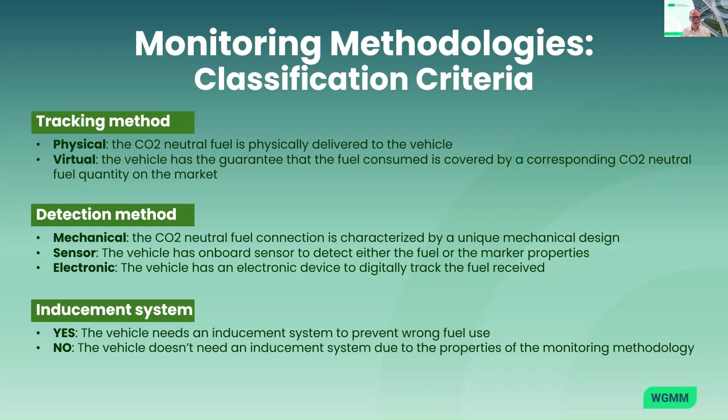But let's go to the next one. As mentioned, in end of December we delivered a long report on this, around 130, 140 pages. We also saw the need to make a summary, one-pagers of each solution, now available since last year. The group also produced other reports, like the availability of feedstock. So there's a lot of interesting work here. With the QR code, you can go to the website and find out more details afterwards if you want to go into even more.

So with that, I think we can go into the first presentation on the options here. To start with, we have Marco from Bosch and Alberto from Eurogas, who will present options 3 and 11 here. So please go ahead.

Thank you very much for the introduction, Mats. Good afternoon, everyone, also from my side. I would like to present option 3 and option 11 together with Alberto about the digital fuel twin.

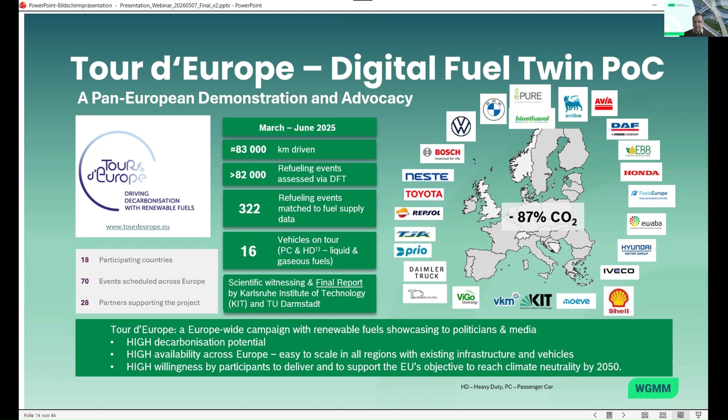To conclude, the benefits of digital tracking and its robustness have been tested with several partners. It's a tamper-proof solution because the data from the vehicle and from the fuel stations, from the cloud, is stored in different places, so it's not easy to manipulate the system on single clients of the system.

It's easy to scale, because no new additional hardware installation is needed along the entire fuel supply chain, and it's flexible for adaptation to any kind of new regulations. Last but not least, it's a universal solution for different liquid and gaseous fuels for different powertrains.

But before going to that, I would like to hand over to Alberto regarding the bio-LNG with convincing figures. Alberto, the stage is yours. Yeah, thank you very much.

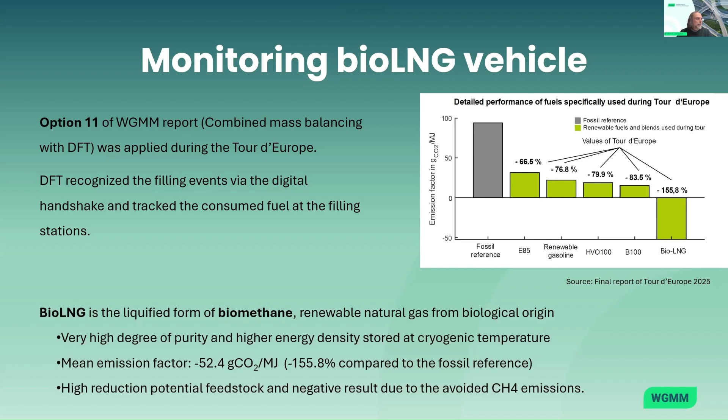Another slide on the bio-LNG key figures. It is now used in heavy-duty vehicles, but the interest in the maritime sector is still growing.

It's a drop-in fuel, so it's compatible with all existing engines, and is already largely available in Europe. We have, according to our detection, more than 300 filling stations already delivering bio-LNG, and with the mass balancing mechanism, all the existing 800 filling stations could deliver certified bio-LNG.

Last but not least, there is a very interesting growing potential of bio-LNG fuel. As you can see on the graph, we are now, in 2023, at a production of around 4 billion cubic meters, which can reach 40 in 2030, around 100 in 2040, and 150 in 2050 across the whole of Europe.

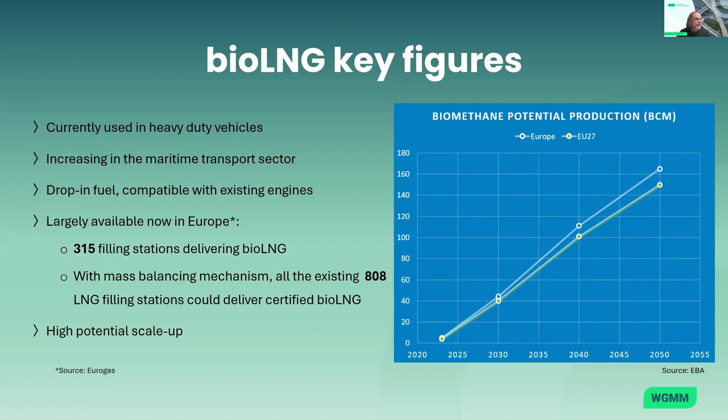So let's return to the Tour d'Europe initiative. One Iveco S-Way LNG truck was equipped with the DFT, and it covered more than 5,000 kilometers across Italy, Austria, Germany, France, and Belgium in June last year, and it was refilled with 100% certified bio-LNG.

The tour included 8 biomethane stations with 7 different energy partners. So it showed that monitoring gaseous and liquid gaseous fuels was possible, and also interfacing with different partners, as you can see on the screen. 7 was included in the tour.

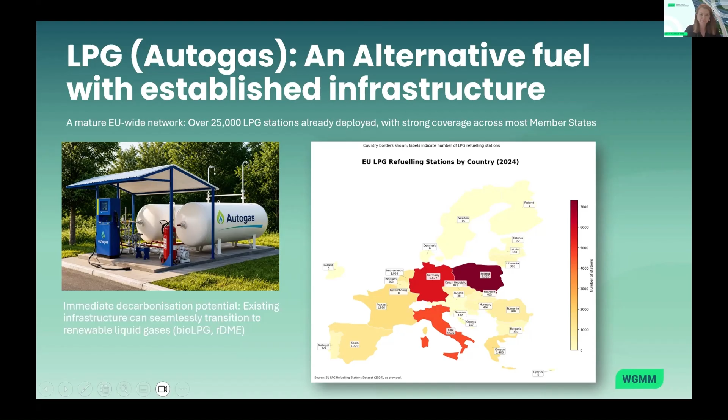Liquid gas is already entering European markets through existing refining processes and distribution infrastructure. Of course, the key question is scale: how much of this can we realistically produce? According to our report, in a high support scenario, we can reach around 7.5 million tons by 2040 and around 27 million tons by 2050. This is a production that could potentially cover 100% of the LPG demand by 2050, based on available European feedstocks, existing industrial production pathways, and co-production with fuels like renewable diesel. So the potential is real, but it depends on the framework we create.

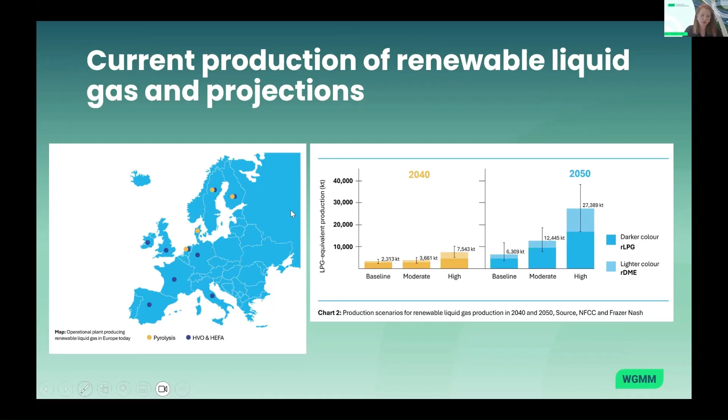Because renewable liquid gas can operate within the existing distribution system, it can offer one of the fastest pathways for near-term emission solutions. That brings me to the core of the discussion, which is mass balance. In a real fuel system, renewable and conventional molecules are mixed across the supply chain. So the key question is, how do we account for renewable fuels in a credible way? Mass balance provides the answer. It ensures that for every unit of renewable fuel produced, an equivalent amount is tracked and allocated to end users without requiring physical separation at every step.

This is not a new concept. It's already used in biofuels, electricity markets, and other certification systems. And it's essential because without mass balance, scaling renewable fuels in real-world systems becomes extremely difficult and costly. To conclude, there are three key messages.

First, renewable liquid gas allows immediate emissions reduction using existing infrastructure. Second, mass balance enables scaling within real-world fuel systems. And third, monitoring methodologies make this system credible and verifiable.

So the technology is there, the infrastructure is there. What we need now is a policy framework that recognizes and enables these solutions at scale. Thank you very much.

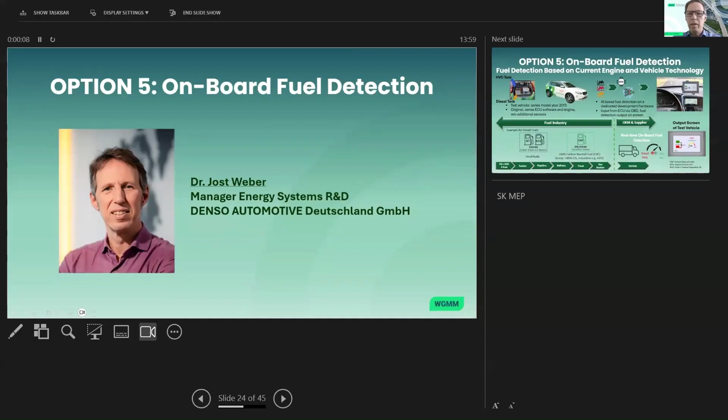Okay, thank you, Mats, for the kind introduction. Today, I'm going to introduce you to option number 5 in the report of the WGMM on onboard fuel detection.

Our technology is based on current engine and vehicle technology. In the fuel industry, they are working on future fuels. We currently have 2 standards. For diesel, we have the EN 590 for regular fossil fuels and blends, where you have up to 26% possibility to blend in paraffinic diesel fuels, which can be renewable. On the other hand, there is already a standard for paraffinic diesel fuels, which can be made out of vegetable oil or waste. These are already available on the market today. They have a reduction potential of more than 80% CO2 reduction.

For example, the HVO, which is also very popular - I'll come to this point later. But in the future, these fuels also have the potential to achieve 100% carbon neutrality. These fuels differ a little bit in terms of properties, in terms of density, viscosity, and compressibility.

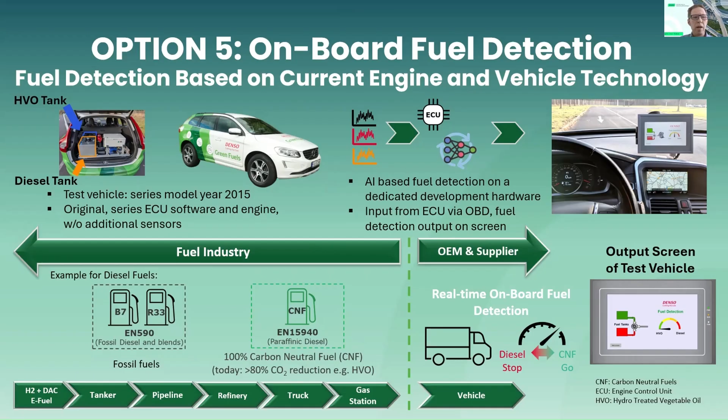So we can try out this under real world driving conditions. We went on with this vehicle across the public streets. We have seen already fuels from the filling stations are available. We have more than 16,000 filling stations in Europe, up to 8,000 only with HVO 100, but also a few with blends.

For example, here you see in the center a test circuit, a test drive around our technical center. We start here, somewhere is our location, and we go on countryside roads, then a little bit highway, and back to the city and then back. So this is a test drive of 32 kilometers, but we also went on other roads and streets.

Across Germany, in the cities, overland, highway drive, we accumulated more than 1,500 kilometers with our vehicle. And we could confirm that with this detection logic, it's quite accurate. We have almost 100% correct fuel detection.

That shows and gives a proof of concept that such a technology can work solely on a system level, on a vehicle. We could even retrofit existing vehicles, and that offers, of course, future potential, depending on the future regulation and what the EU Commission is demanding from the new vehicle class, which hopefully will be introduced.

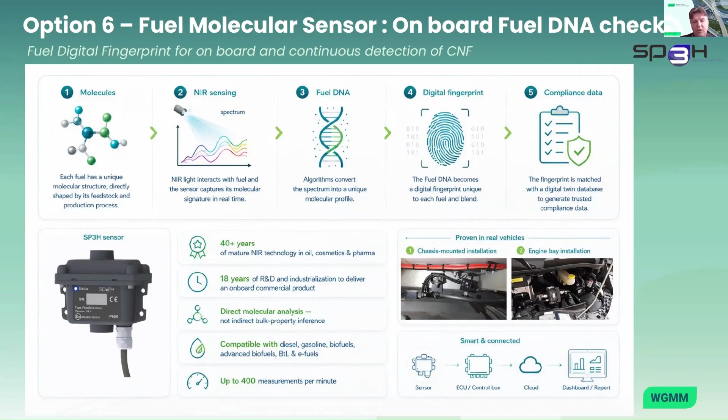So that's what we are doing right now. How do we do that? First, it's not R&D, not a nice demo, not a few engineers around vehicles - it works with real fleets, real drivers, customers, real roads, and real operating constraints. Since 2021, we have been running everything in Europe, with more than 3,000 systems homologated on trucks and buses in operation, especially in France. We have already monitored more than 130 million kilometers, with a certified saving of something like 80,000 tons of certified CO2 thanks to our technology.

So option 6 is not a PowerPoint technology, it's a product - we are already cybersecurity compliant and certified for onboard applications. Over the last 2 years, what we have added to our system is a way to connect it outside the vehicle. With our partner Electromaintenance, we have developed a way to connect to clouds and outside databases, not only the ECU.

The sensor checks the fuel, we are connected to the Atlas box with a 4G antenna, and then we can store the information in secure cloud applications. We can produce at any time, for any route, fuel use and CO2 certificates. The idea is to be sure we know exactly what fuel was put in which vehicle, for how long, for each client, and then edit and produce the CO2 report for that typical use.

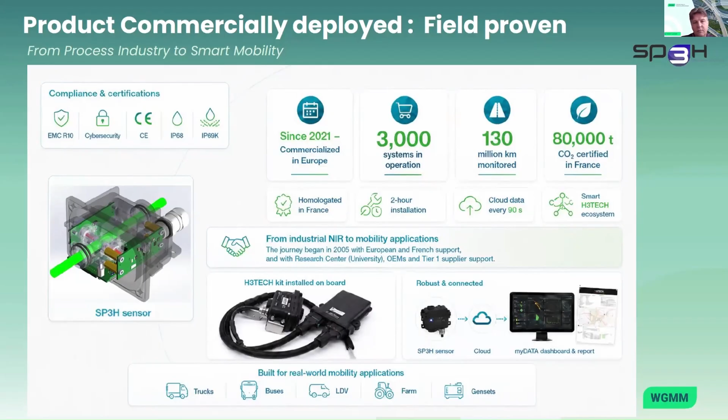So to give a concrete example of what we have done, it's our Tracked & Trusted European HVO Tour achieved last time in December.

We have our partners: Stellantis, Pro1, Atlas, DINEF, and Aix-Marseille Provence Métropole as a partner. We used normal vehicles, normal roads, all the HVO service stations in Europe, and normal refueling operations. We didn't change anything on the infrastructure or the vehicle, only installed the H3TECH kit.

We ran 20,000 kilometers within 1 month, nearly 300 hours on the road, across 16 different countries, with network retail. We tested 20 fuel brands, 47 refuelings, including tests with random diesel fuel and diesel extreme winter grades, because diesel extreme winter grade is very close to HVO.

The benefit was confirmed savings of nearly 4 tons of CO2 avoided, and the sensor generated more than 5 million checks, over 100,000 aggregated records in myDATA and in the cloud. That is basically information regarding the exact location of the vehicles, HVO percentage, calculation of CO2, and distance driven by the drivers. In many cases, the result was exactly what we were expecting.

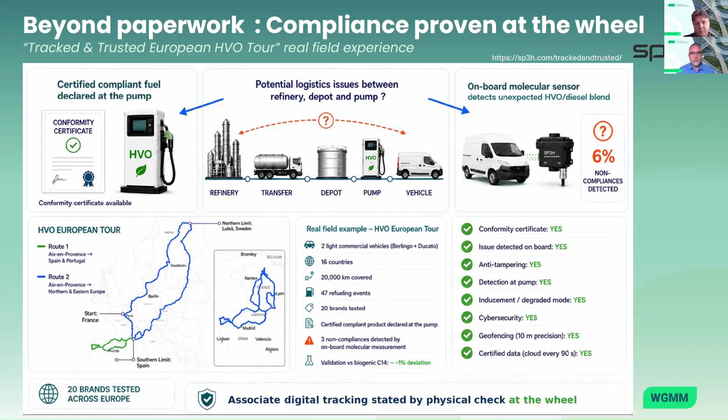The question says HVO has the same chemical composition as GTL, which is fossil fuel. How are the two distinguished?

It's like a different brand of whiskey, so it's not exactly the same composition. Yes, there are no aromatics; it's mainly paraffin and isoparaffin, but the carbon numbers defining the range, say between 9, 10 to 16, are not distributed the same. So even if it's pure isoparaffin and paraffinic, the distribution between paraffin and isoparaffin is not the same, and the molecule lengths differ. So when you're listening to the music of the molecules, a short chain of 12 versus a chain of 16 gives a completely different picture, and we are able to detect and differentiate GTL from HVO.

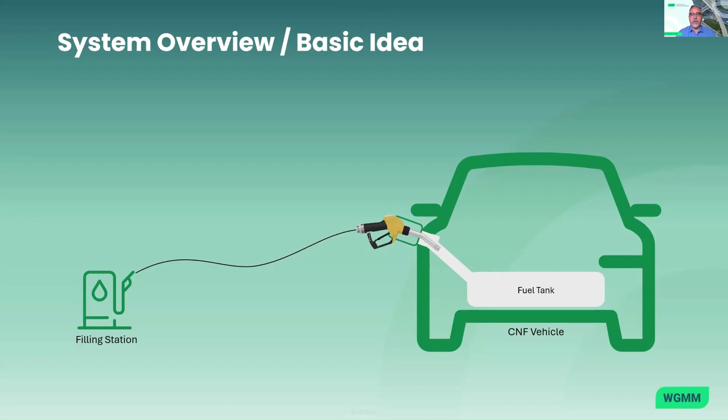I will start immediately with the overview of our system. The basic idea when we started almost 2 years ago was: if we want to ensure the vehicle is running exclusively on carbon neutral fuel, we work on the refueling process. The idea was that if we put NFC technology at the refilling point, adding an NFC tag on the filler nozzle and an NFC reader on the vehicle side, we can ensure the right nozzle is used during refilling. NFC means near field communication, a subgroup of RFID. RFID is the global one, and near field means below 10 centimeters.

So we quickly recognized that this method is not really tamper-proof, because you can copy such a tag and put a copy on the canister and refill with the wrong fuel. Therefore, we said we need additional measures to be tamper-proof.

Our first idea was to have a bidirectional communication between the vehicle and the filling station. Also here we recognized quickly that some guys who are familiar with the communication could create a fake filling station. And therefore we said, okay, we need a third party in this system.

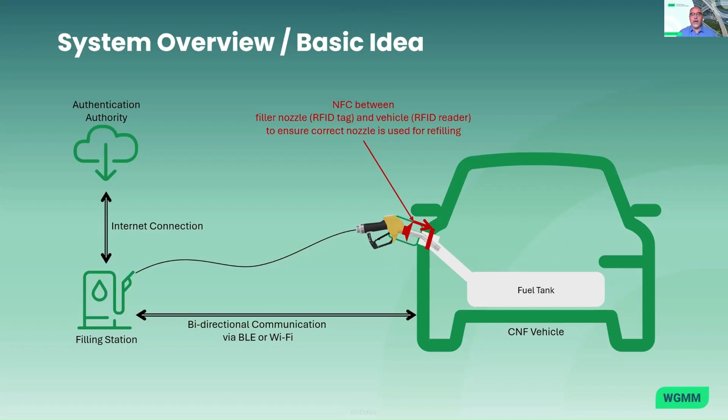And therefore we named it Authentication Authority, which is nothing else but a server in the internet or a cloud-based solution. Also with this system, we cannot avoid that the vehicle is refueled. So the vehicle needs something to protect from being refueled with the wrong fuel. Therefore, we said we need a valve between the filler neck and the tank, and we call this valve refill release valve.

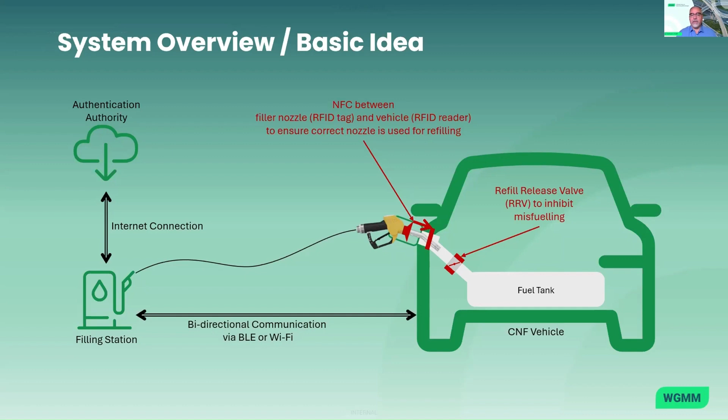So we named the whole system Electric Fuel Trust Portal due to the fact that it's all about trust. So we have to trust the filling station and we need to block the fuel. Therefore, we need a portal, and that's why we named it that way. And with this system, we have a tamper-proof solution, which is preventing the misfueling.

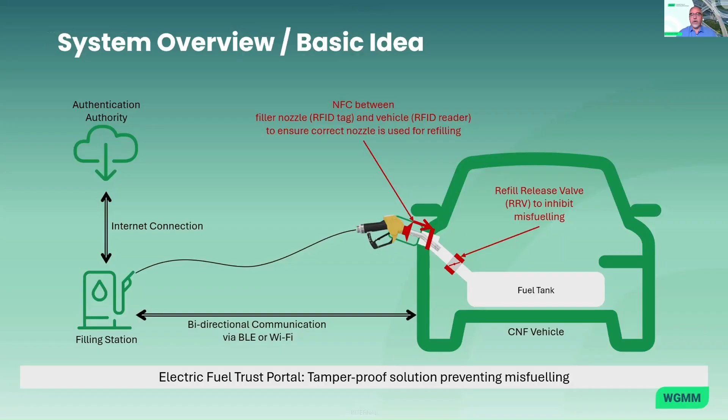To explain how this authentication process works, I will show you this slide where we have the authentication authority on the top line, the vehicle on the bottom line, and the filling station and the RFID tag in the middle. When the vehicle arrives at the filling station and the filler nozzle is inserted, the vehicle can read information on the RFID tag.

The most important information is how to connect to the filling station, the GPS coordinates of the filling station, and of course the fuel type and the tag UID.

In general, we check all the time if the RFID tag is available during the whole refueling process. So it's not possible to replace the filler nozzle during this refueling process, which is important so that you cannot cheat.

With the information on the tag, we can perform already the first checks. All checks which are running in this process are marked green. The first check is the GPS check. We can now check if the vehicle is really at the desired position at the filling station. And we, of course, check if the fuel is the right fuel.

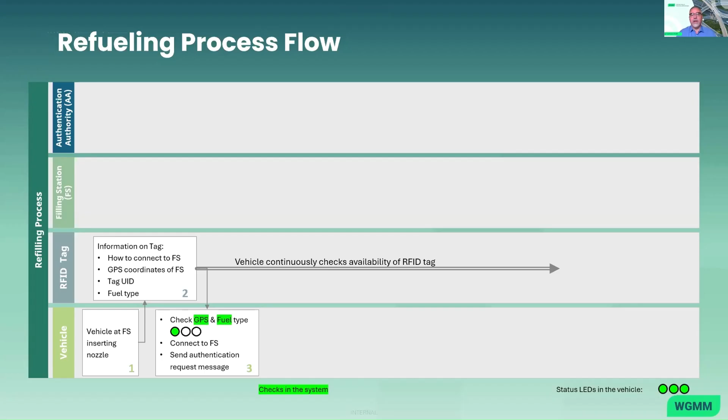If this is the case, to show the driver the progress of the refueling, we show the first LED going green, and we connect to the filling station and send an authentication request message. Within this authentication request message, there's also the tag UID, and the filling station can prove if the tag that was read out by the car was really the tag that is from the filling station.

The request message is forwarded to the AA, the authentication authority, and the authentication authority can now check if the filling station is a certified filling station. It can even check if the fuel in the fuel tank of the filling station is a certified fuel or which kind of fuel it is.

And if it's okay, it will sign the message and send it back to the vehicle. The vehicle can now check the signature. All these checks are done digitally. So checking a digital signature means having a public and private key. It's the typical way to check the digital information.

After checking that, and if we have created now the trust in the filling station, we illuminate the second LED and we open the refill release valve. After the refill release valve is open, the vehicle is ready for refilling, and we communicate that to the filling station. The filling station can then turn on the fuel pump, and you're ready to refill the car in that case.

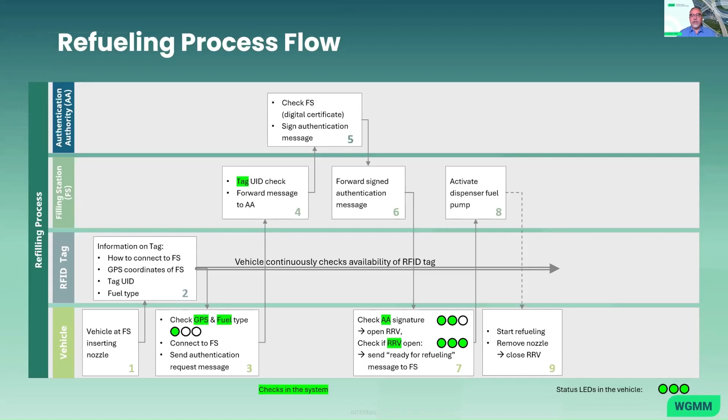After refilling, the nozzle is taken out, and immediately the refill release valve will close. And if the nozzle is put back into the dispenser, then the filling station can create a digital receipt. And within this digital receipt, which is sent then to the vehicle, you can perform the final checks.

You can again prove, was it really the right fuel? And you can check if the fuel tank level increased in the same way as the amount of fuel that was delivered. You can also hand over with this digital receipt parameters of the fuel, so you can adjust your engine control unit according to the fuel that was sent.

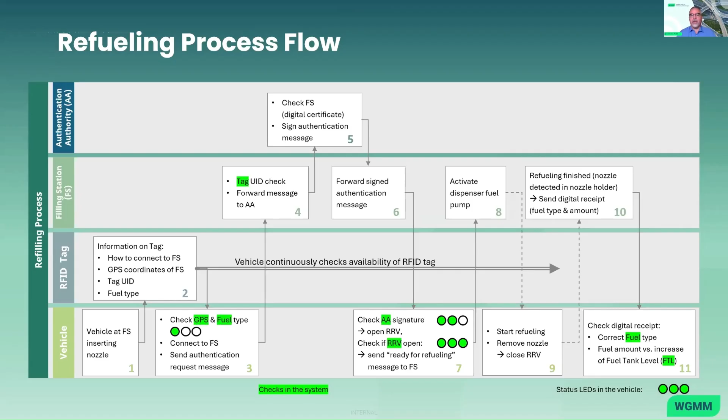We have put this system into 2 demo cars together with our partners, Hyundai Europe and Toyota Europe. They both sponsored us 2 demo vehicles, and we have put the system into these 2 cars.

We worked together with Elaflex. They supported us in integrating the RFID tag into the filler nozzle, and they supported us by doing refueling tests with open and closed refill release valve. And finally, we have the Kempe GmbH, which are operating filling stations close to Nuremberg. They supported us by doing some video recording on their filling stations. Thank you to these partners.

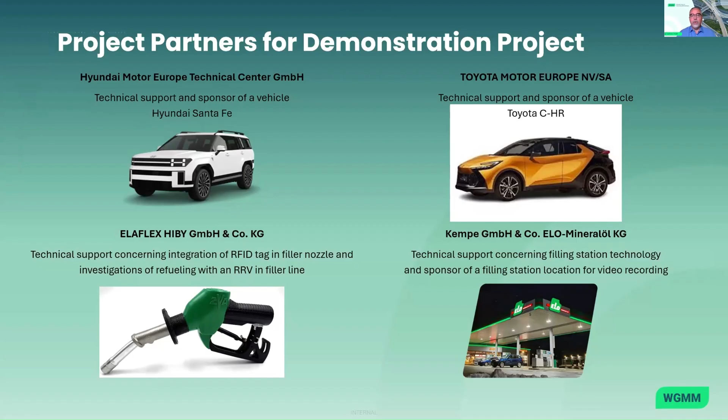Thank you very much. I will now show you a video of a refueling process at the filling station. You see on the left-hand side the video and on the right-hand side the process that I explained right before. These two, the video and the diagram, are synchronized so that you can see how fast each step or how much time each step takes. And I will start the video right now.

Please see also the LEDs which are in the window above the filler nozzle, filler neck. They are going green within the reflection of the dispenser. You see, the whole process does not really take much time, and it will not interfere the refueling process much. And this is exactly the point what we wanted to demonstrate. Such kind of methods do not really take more time than reading a credit card, for example.

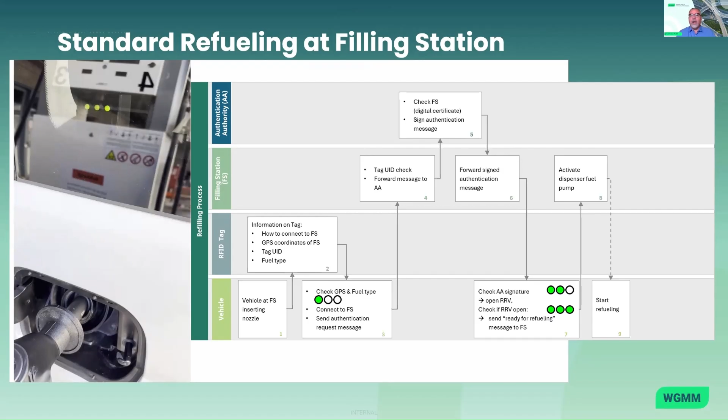So at the end, we think we have a proof of concept for this option, and we think this is a tamper-proof solution which has the big advantage that it's preventing a misfueling. Thank you very much.

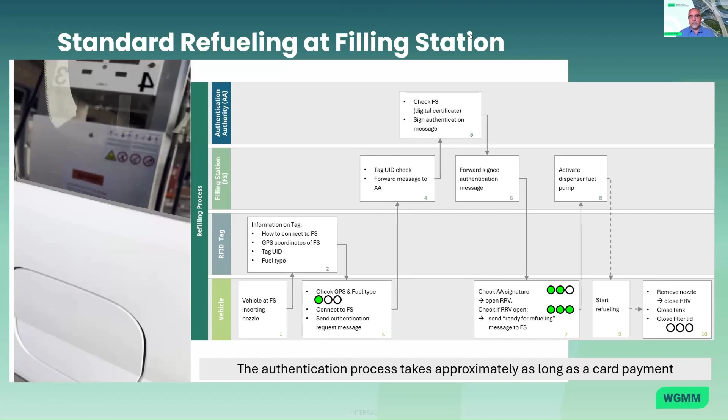We have a look towards the future, heavy-duty vehicles in the spotlight. So although we have been focusing on passenger cars and vans, many of the solutions work also, of course, for the heavy-duty side. And here's an example of that. So we will hear Estebales and Hector from Repsol and Christina from Prio presenting this. Please go ahead.

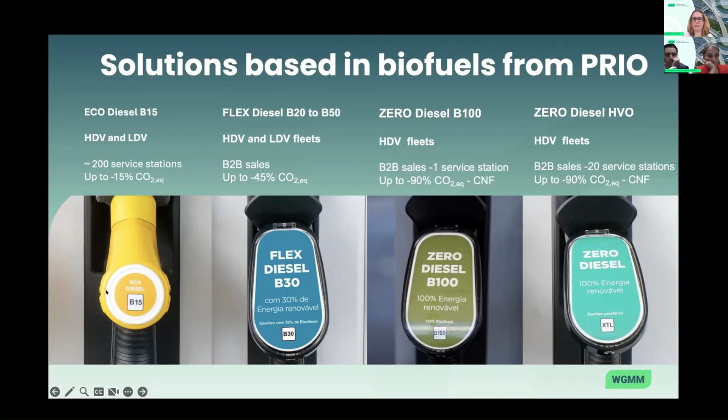That's precisely what the case study I'd like to share with you today is: the usage of zero diesel B100 in two Scania trucks from Transportes Aguieira, which is a customer and also a transport company that works with us. They have been using B100 since February 2024, so more than 2 years now, more than 100 cubic meters, more than 400,000 kilometers usage. They have been refueled with 100% certified biodiesel, supplying it at one service station. So far, all transactions are being monitored and registered in our fleet card system with mileage control. These two vehicles have also participated in Tour d'Europe.

I would also like to share that as we are certified by ISCC, we have developed this certificate of emission reductions for our customers, as there was a need for that, so that they can comply and report their emission reductions by using these carbon neutral fuel solutions. Thank you for your attention. I'll pass to a colleague from Repsol.

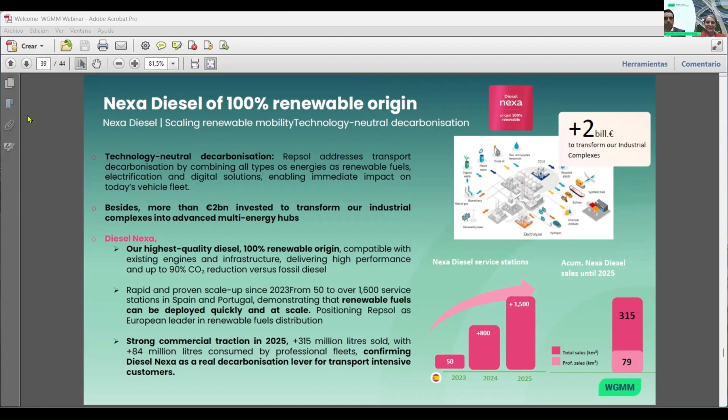And in that sense, we have scaled the solution really quickly. We have it in the market right now. So, as you said, we need different types of monitoring technologies in order to verify, vehicle by vehicle, that they are running only exclusively with renewable fuels. We need simple solutions, simple and really easy to put into the market. As Marco said, the digital technology is really easy to use, easy to implement and to scale up.

And we tested it in the market from June to December of last year with two of the main clients we have today. One is Sesé, a company dedicated in one of its brands to freight transport, and also ALSA, passenger transport. We can check and verify, from the origin of the fuel through all the value chain to the gas stations and to the vehicles, that we are using renewable fuel, that we can certify the use of renewable fuel, and we can certify and quantify the CO2 emissions.

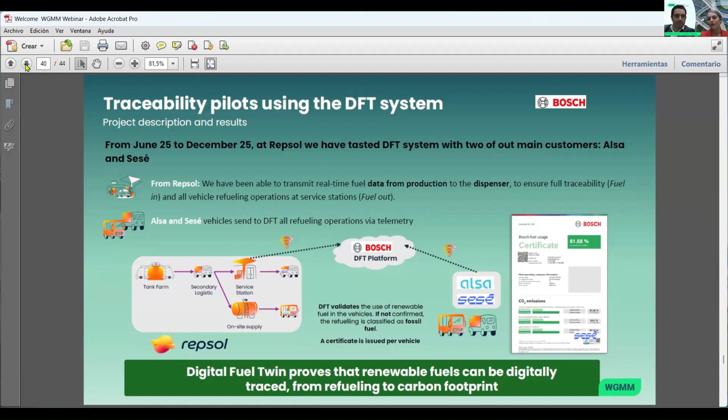And in case we do not use renewable fuels, and they fueled with fossil fuels, this technology could also check that there were no renewable fuels, and this is not counted in the CO2 reductions. So thank you, everyone. Now we are talking with Sesé, who is going to talk about their experience.

Good afternoon. I'm Héctor Cebrián, Head of Institutional Relations and Sustainability in Sesé. Sesé is a supply chain management company with many divisions such as logistics, transport, and industrial services. Related to sustainability, the main impact is the emissions of our truck fleet, and because of that we have many actions focused on trying to reduce CO2 emissions.

The main action we have been developing in recent years is the use of HVO in our trucks. We started with the first operations in 2022 together with Repsol, and it started with only 10 trucks. Today it's more than 300 trucks, 30% of our own fleet, approximately 8,300,000 liters.

The main requirement we have to advance with decarbonization with this action, the use of HVO, is to prove that it is sustainable. We were able to demonstrate that we could reduce more than up to 90% of the CO2 emissions. We also need to maintain the operational flexibility that our logistics and our customers' logistics demand, and for sure we need to balance competitivity with sustainability.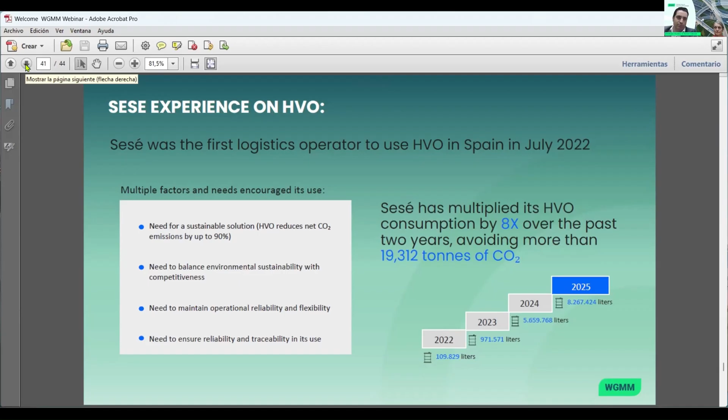In that case, HVO, focusing only on the extra cost of the fuel, is a very efficient solution, and we believe it's going to be, for the next years, the main option to decarbonize. Nevertheless, it's quite important to advance with the traceability of its use.

No, that is a fuel that could be used in the same vehicle, and because of that, we need to prove that we are not using fossil fuel. In this moment, our 8 million liters that we consumed last year is using the mass balance system that we have as a commitment with many of our customers, and we use some of our trucks of our fleet to try to achieve that target, and after that, with a third party, we demonstrate that there is no double counting. Nevertheless, it's important to advance the system, with Bosch and with Repsol, to try to make this digital traceability of the use of HVO.

And we started in June 2025, until January 2026, a pilot project to try to demonstrate that it's possible to certify in a digital way with 3 of our trucks, and we were using at the same time HVO and diesel.

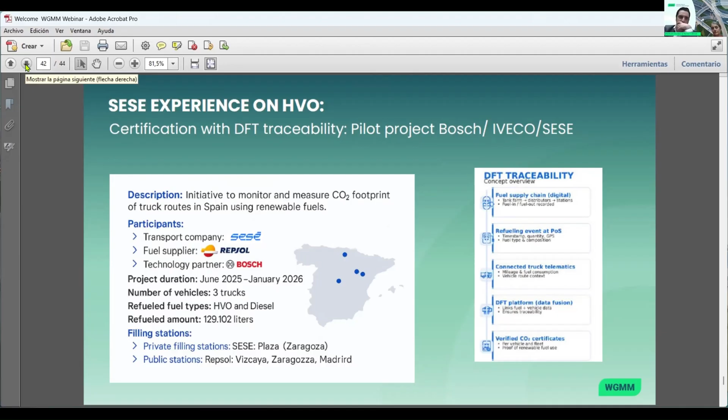We consumed 130,000 liters in that period, in 2 different types of stations: private stations of Sesé and public stations of Repsol. With all the information that we have, we were able to show some certificates, and you could see that there is a reduction of approximately 70%, because in that case, it was not always refueling with HVO. It was also in some cases diesel, but we could prove that we could distinguish when it's using HVO versus when it's using diesel, and this is very important to us.

To summarize, I think it's an important technology that is going to allow us not only to make more traceability of the use of HVO, it's also going to be a solution to try to prove to the authorities, to prove to the institutions, that when we are using a combustion vehicle, it's possible to use sustainable fuel. And we expect that it's going to advance in the future.

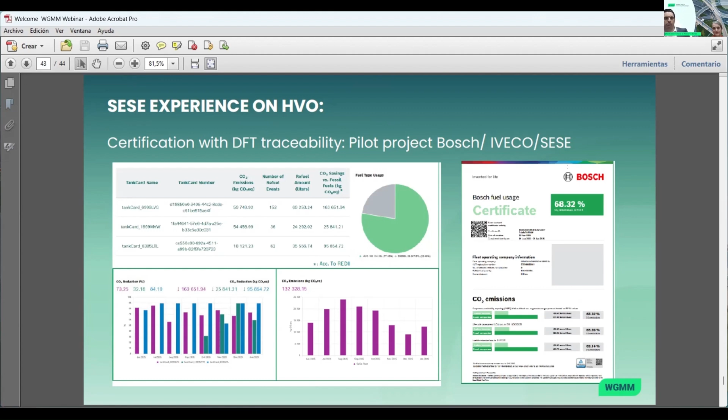Very interesting to hear here. I really hope that everyone that has been listening now has got a good feeling that there are many good ways on how to do this, and it's already working today. So thanks for all the good presentations, and now we will head into the Q&A section.

I'll kick off the questions here, and I think we can start with Alberto. There's two questions for you. First one is: is bio-LNG compatible with all existing engines, including diesel and gasoline engines? Thank you for this question, it gives me the opportunity to clarify this point. Bio-LNG is compatible with existing LNG vehicles, not gasoline or diesel vehicles, meaning that no adaptation, no technical modification of the existing vehicles is needed to run also on the biological version of LNG.